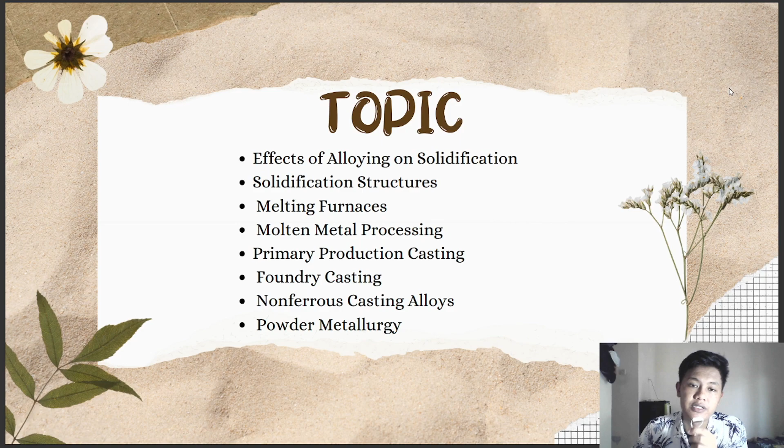This is the topic that we will discuss in this presentation. Okay, let me begin.

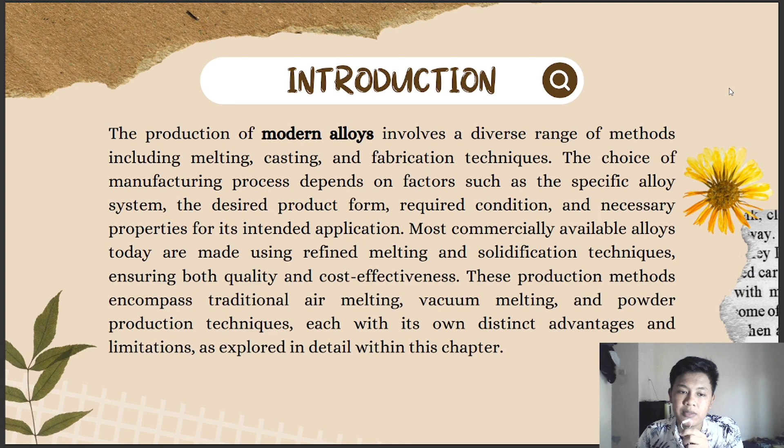Introduction. The production of modern alloys involves a diverse range of methods, including melting, casting, and fabrication technique. The choice of manufacturing process depends on factors such as the specific alloy system, the desired product form, required condition, and necessary properties for its intended application. Most commercially available alloys today are made using refined melting and solidification techniques, ensuring both quality and cost effectiveness. These production methods encompass traditional air melting, vacuum melting, and powder production techniques, each with its own distinct advantage and limitation, as explored in detail within this chapter.

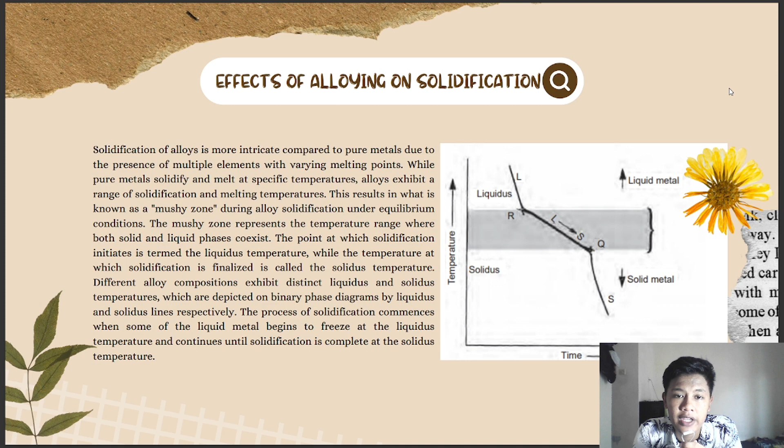Effects of alloying on solidification. Solidification of alloys is more intricate compared to pure metals due to the presence of multiple elements with varying melting points. While pure metals solidify and melt at specific temperatures, alloys exhibit a range of solidification and melting temperatures. This results in what is known as a mushy zone during alloy solidification under equilibrium condition.

The mushy zone represents the temperature range where both solid and liquid phase coexist. The point at which solidification initiates is termed the liquidus temperature, while the temperature at which solidification is finalized is called the solidus temperature. Different alloy compositions exhibit distinct liquidus and solidus temperature, which are depicted on binary phase diagram by liquidus and solidus lines, respectively.

The process of solidification commences when some of the liquid metal begins to freeze at the liquidus temperature and continues until solidification is complete at the solidus temperature.

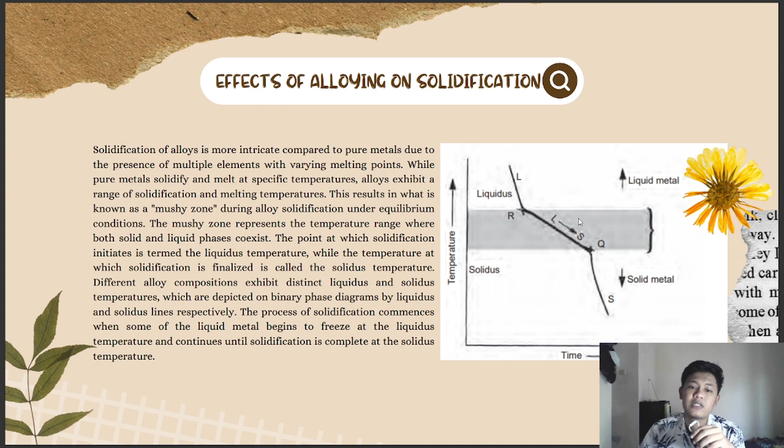The specific type of growth is influenced by how heat is extracted from the system. Planar growth occurs when there is a positive temperature gradient ahead of the solid-liquid interface, resulting in heat removal through conduction into the growing solid. This creates a smooth interface and planar growth into the liquid.

Conversely, if there is a temperature inversion leading to a decrease in temperature ahead of the interface, cellular or dendritic growth occurs. The distinction between cellular and dendritic growth is primarily based on the degree of undercooling. Small undercoolings tend to produce cellular growth, while larger undercooling leads to dendritic growth. In pure metals, undercooling is typically caused by thermal supercooling, whereas in alloys, it can result from a combination of thermal and constitutional supercooling.

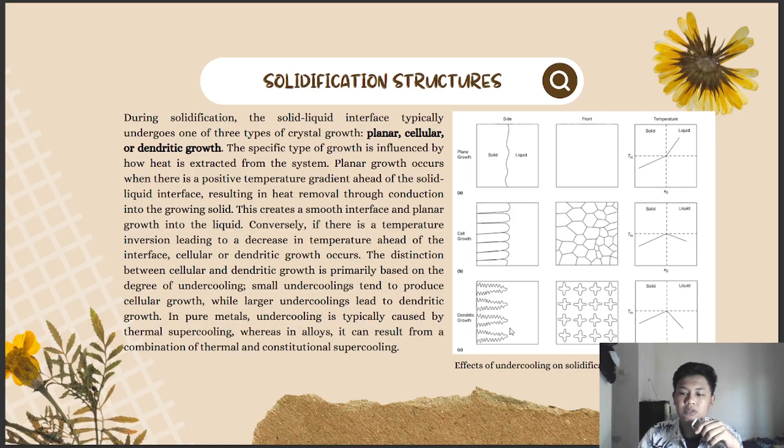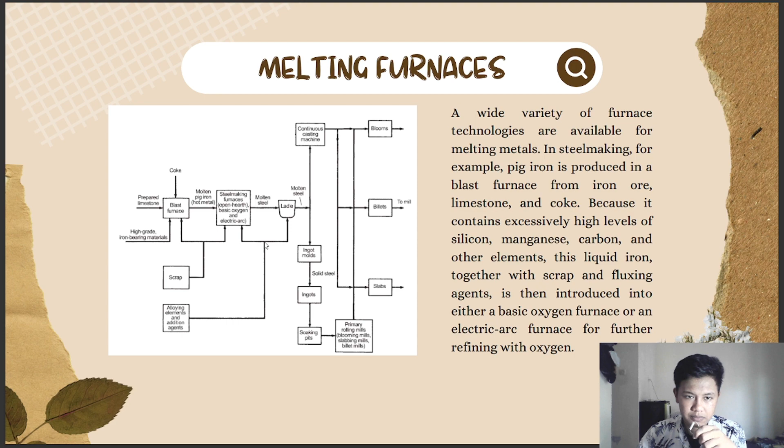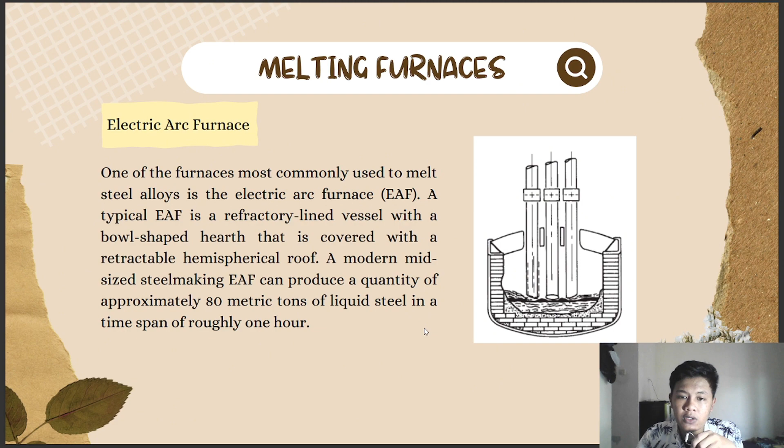Next, first one is electric arc furnace. One of the furnaces most commonly used to melt steel alloys is the electric arc furnace, or EAF. A typical EAF is a refractory lined vessel with a bowl-shaped hearth that is covered with a retractable hemispherical roof. A modern mid-sized steelmaking EAF can produce approximately 80 metric tons of liquid steel in a time span of roughly 1 hour.

Second is induction furnace. Induction furnaces have become a widely used means for melting ferrous alloys and increasingly non-ferrous alloys as well. The key to the ready acceptance of induction furnace has been the excellent metallurgical control that can be exercised, coupled with relatively low pollution compared to cupola furnace and good thermal efficiency compared to EAF melting. Induction furnaces are very efficient, are made in many different sizes, and are relatively simple in design and operation. Small quantities of materials can be melted rather quickly, which allows metal to be delivered at regular time intervals. A wide range of metals can be melted with this type of furnace, although little refining of the metal is possible.

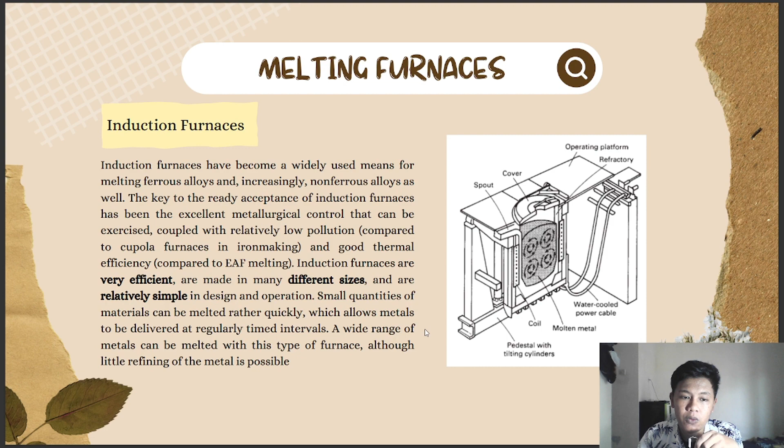The third is vacuum induction melting furnace. Vacuum induction melting can be used to advantage in many applications, particularly in the case of complex alloys employed in aerospace engineering. These advantages have had a decisive influence on the rapid increase of metal production by VIM, which stands for vacuum induction melting.

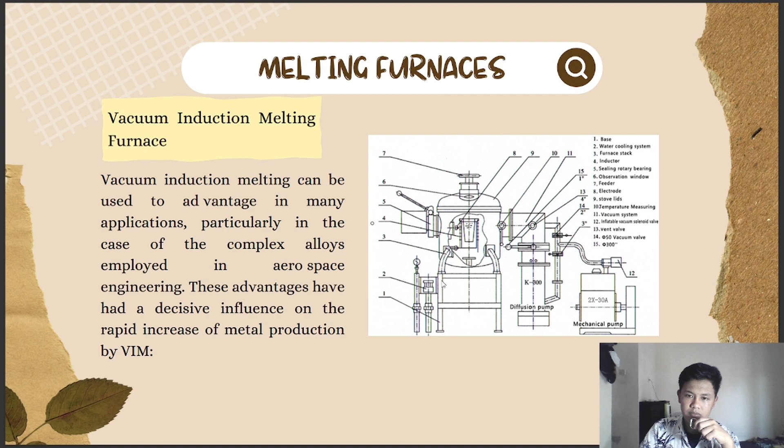Next is remelting. There are two commonly used remelting processes for metal refinement: electroslag remelting, or ESR, and vacuum arc remelting, or VAR. In both processes, an electrode is melted as it advances into the melting region of the furnace. As the working face of the electrode is heated to the melting point, drops of liquid metal that fall from the electrode face are collected in a lower crucible and rapidly solidified.

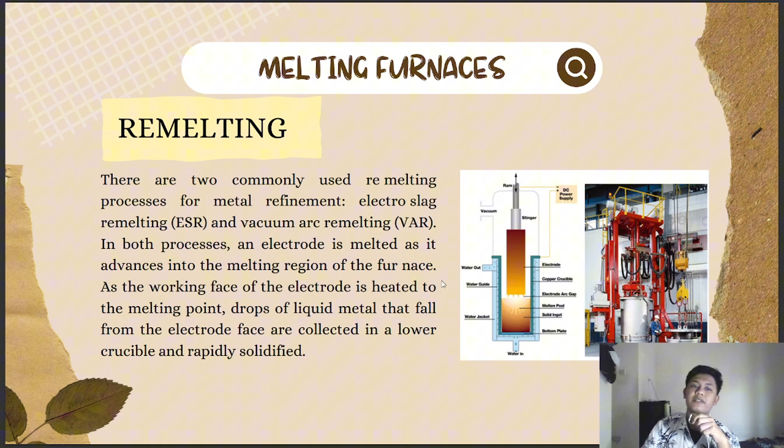The next topic is molten metal processing.

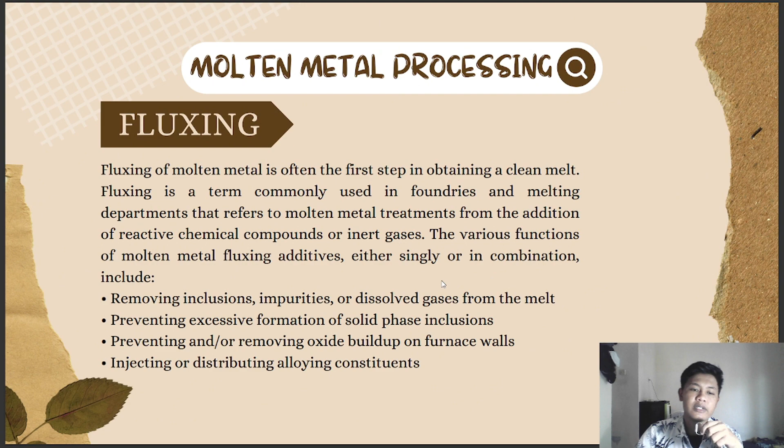Fluxing of molten metal is often the first step in obtaining a clean melt. Fluxing is a term commonly used in foundries and melting departments that refers to molten metal treatments from the addition of reactive chemical compounds or inert gases. The various functions of molten metal fluxing additives, either singly or in combination, include removing inclusions, impurities, or dissolved gases from the melt, preventing excessive formation of solid phase inclusions, preventing and removing oxide buildup on furnace walls, and injecting or distributing alloying constituents.

Next is primary production casting: static ingot casting. Several ingot casting processes have been designed and developed for downstream manufacturing processes. The most common is static ingot casting, where molten metal is poured into a vertical, open-ended mold. The mold is made of metal, usually cast iron, and is tapered along its length so that solidified metal can be easily withdrawn from it.

The fundamental requirements that must be satisfied by an ingot are the capacity to withstand subsequent mechanical reduction operations without rupturing or cracking, with the capability to yield a commercially acceptable finished product.

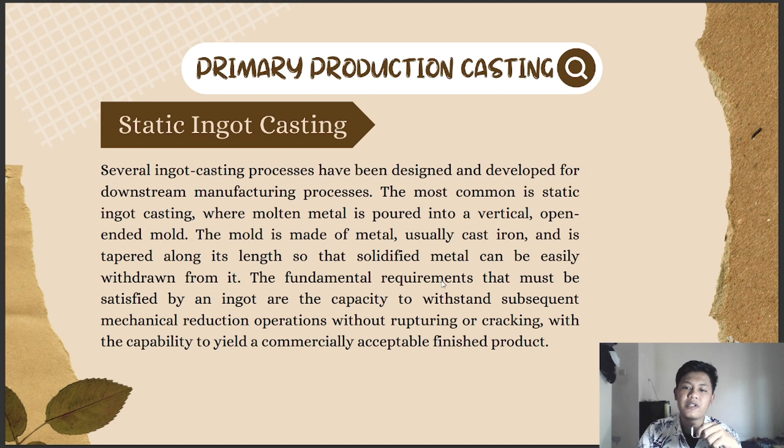Continuous casting process. Continuous casting can take two forms, vertical or horizontal. Horizontal casting is suitable for metals with lower melting points like copper, aluminum, and cast iron.

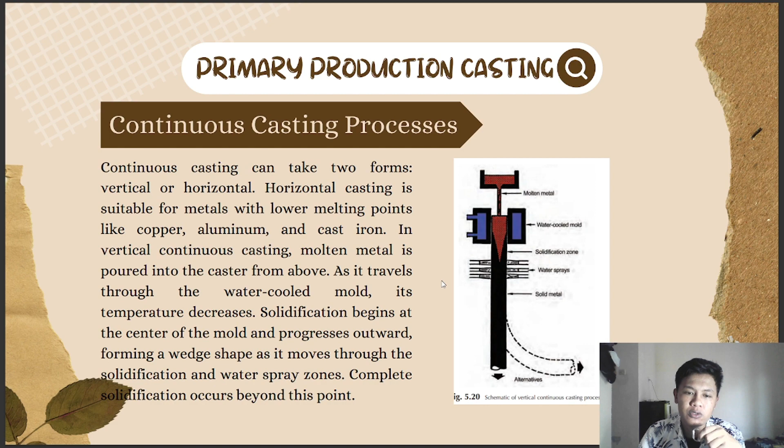In vertical continuous casting, molten metal is poured into the caster from above. As it travels through the water-cooled mold, its temperature decreases. Solidification begins at the center of the mold and progresses outward, forming a wedge shape as it moves through the solidification and water spray zones. Complete solidification occurs beyond this point.

Foundries use various methods to cast parts with complex shapes and interior surfaces. Molds are made in a variety of ways so that the molten metal poured into the mold cavity results in a part with the shape and dimension of the finished form. The choice of molding method depends on several factors such as part size and shape, quantity, tooling, and the molten metal being poured into the mold.

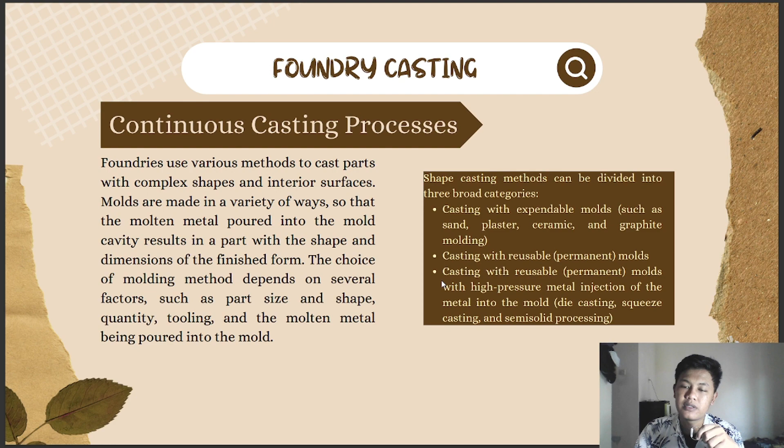Shape casting methods can be divided into three broad categories: casting with expendable molds, such as sand, plaster, ceramic, and graphite molding; casting with reusable molds; and casting with high pressure metal injection of the metal into the mold.

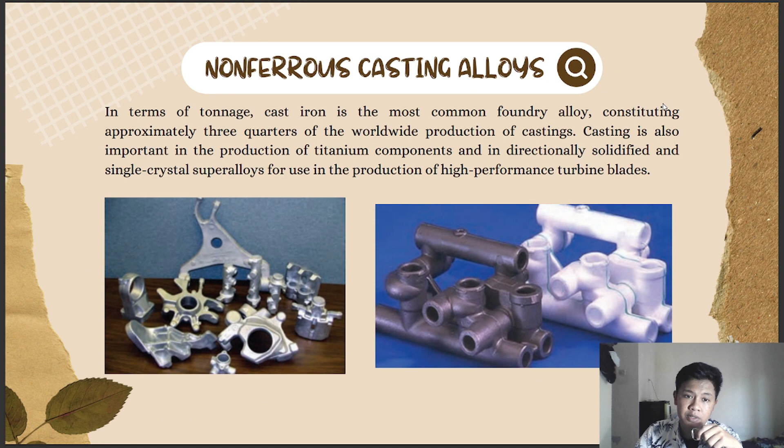Next is non-ferrous casting alloys. In terms of tonnage, cast iron is the most common foundry alloy, constituting approximately three-quarters of worldwide casting production. Casting is also important in the production of titanium components and directionally solidified and single crystal superalloys for use in high-performance turbine blades.

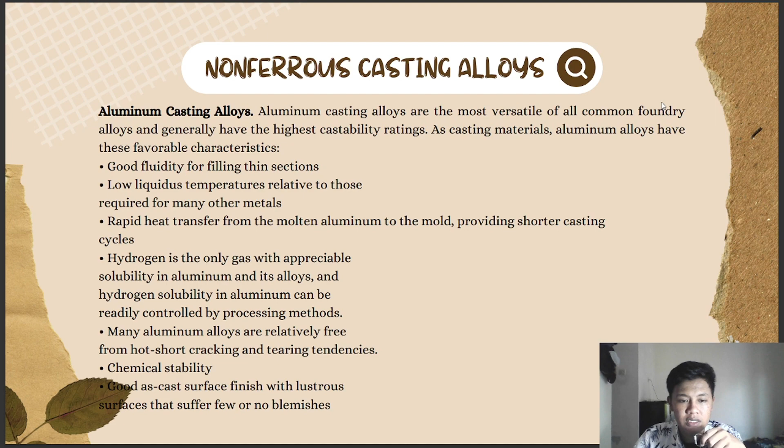First is aluminum casting alloys. Aluminum casting alloys are the most versatile of all common foundry alloys and generally have the highest castability ratings. As casting materials, aluminum alloys have favorable characteristics: good fluidity, low liquidus, and rapid heat transfer from the molten aluminum to the mold. Hydrogen is the only gas with appreciable solubility in aluminum and its alloys. Many aluminum alloys are relatively free from hot short cracking and tearing tendencies, have chemical stability, and good as-cast surface finish with a lustrous surface that suffers few or no blemishes.

Next, copper casting alloys. Copper casting alloys are available as sand, continuous, centrifugal, permanent mold, and some die castings. They are generally similar to their wrought counterparts but have their own unique composition or property characteristics.

Next is magnesium casting alloys. Magnesium castings of all types have found use in many commercial applications, especially where their lightness and rigidity are a major advantage, such as for chainsaw bodies, computer components, camera bodies, and certain portable tools and equipment.

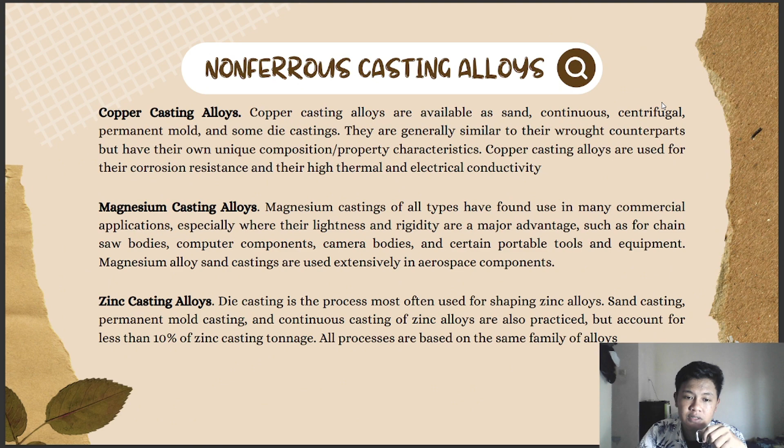Next is zinc casting alloys. Die casting is the process most often used for shaping zinc alloys. Sand casting, permanent mold casting, and continuous casting of zinc alloys are also practiced, but account for less than 10% of zinc casting tonnage. All processes are based on the same family of alloys.

The next topic is powder metallurgy. One of the more recent metallurgical developments in the manufacture of modern alloys is the development of powder metallurgy processing. Metal powder can be produced using a wide variety of mechanical methods as well as by chemical and electrochemical methods.

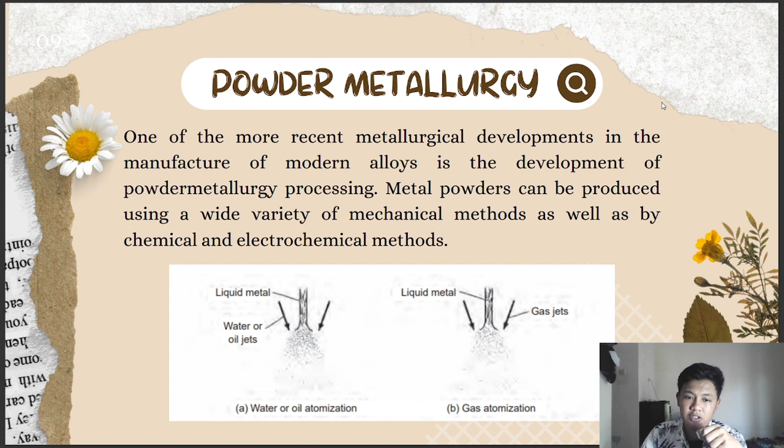You can see here there are water atomization and gas atomization. Water atomization: in terms of tonnage, water atomization is now the preeminent mode of atomization for metal, especially ferrous metal powder. The largest commercial application of water atomization is iron powder for press and sinter applications, and approximately 60 to 70% of the world's production of iron powder, which now totals more than 600,000 metric tons per year, is produced by water atomization. This is the process of water atomization in powder metallurgy: melting, atomization, particle solidification, and collection.

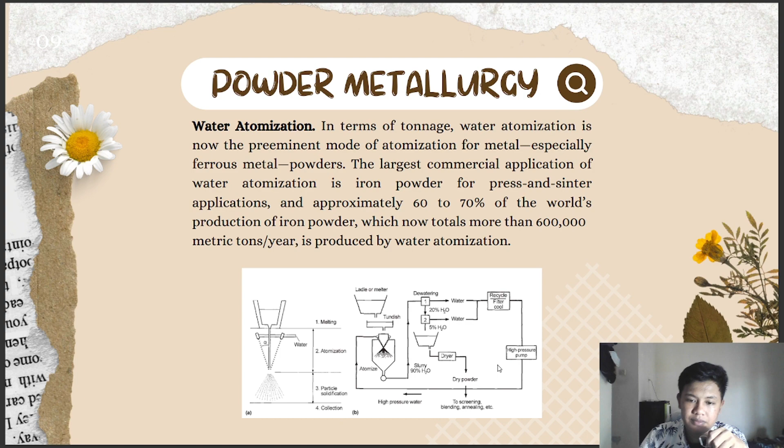Next is gas atomization. The gas atomization process generally produces powder particles that differ from those produced by water atomization in terms of their geometry and surface chemistry. Gas atomized powders are typically more spherical in geometry and possess a lower surface oxygen content than their water atomized counterparts. During the gas atomization process, the liquid metal is disrupted by a high-velocity gas, such as air, nitrogen, argon, or helium, that is directed through a specially shaped nozzle.

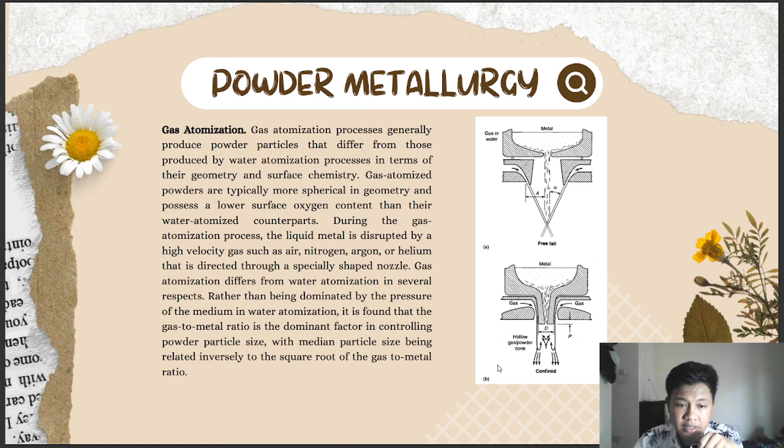Gas atomization differs from water atomization in several respects. Rather than being dominated by the pressure of the medium as in water atomization, it is found that the gas-to-metal ratio is the dominant factor in controlling powder particle size, with median particle size being related inversely to the square root of the gas-to-metal ratio.